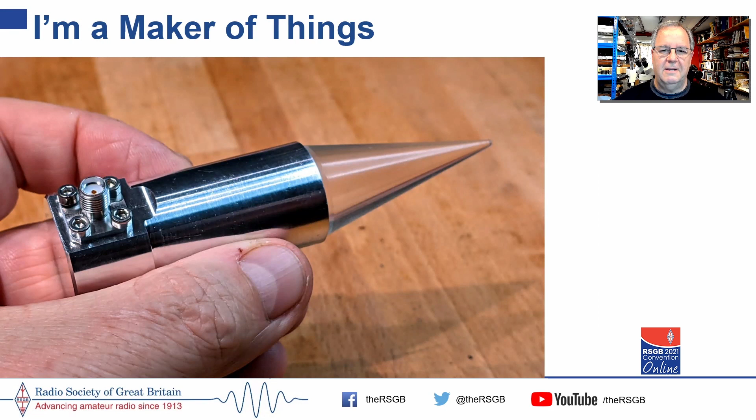So these days I define myself. What I do in life is I'm a maker of things. I create things. Microwaves and machining has sort of taken over my life at the moment, and I'm very, very busy making exciting and interesting things with some very exciting and interesting people.

45 years ago, as an electronic engineering student in a different life and another century, I took a short course in the basics of machining and metrology, taught by Bob Corley and the team at what was then the Post Office Factories Division. My father and several uncles had worked as machinists and inspectors, mostly on gas turbines and turbochargers. All of them advised me very strongly to choose a career path which didn't involve oil, swarf, noise, danger and 6 AM shifts.

So I followed my Auntie Val and great uncle Les into the world of electronics instead. Then microprocessors happened and personal computers, and as a result I've wasted the intervening 40 years getting paid to do things to computers instead of real work.

I first got into microwave radio in 1974, and of course I asked my dad for help making a 10 GHz micrometer wave meter and a directional coupler and Gunn source. Exciting times. I migrated to LF for a long time after that, rarely operating above 2 MHz. But I got bored of stamp collecting once I was approaching 300 DXCC entities worked on top band.

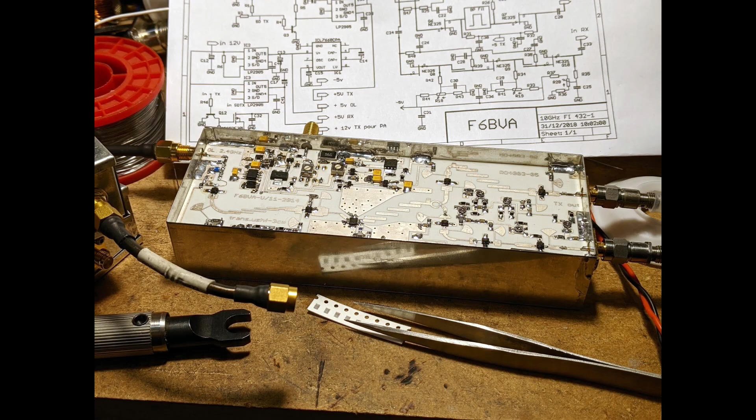It took me 25 years to realise that I didn't really enjoy talking to random strangers on the radio. I was more of a maker than an operator. It was a big relief to realise that was perfectly fine.

5 years ago I subscribed to Dubus and saw wondrous creations in metal that were full of mystery about how they worked and how they'd been made, and I wanted to play. My father had just died, and as I'd never really talked to him about machining and metrology and didn't know any machinists, I had to turn to YouTube and Twitter to gain an education.

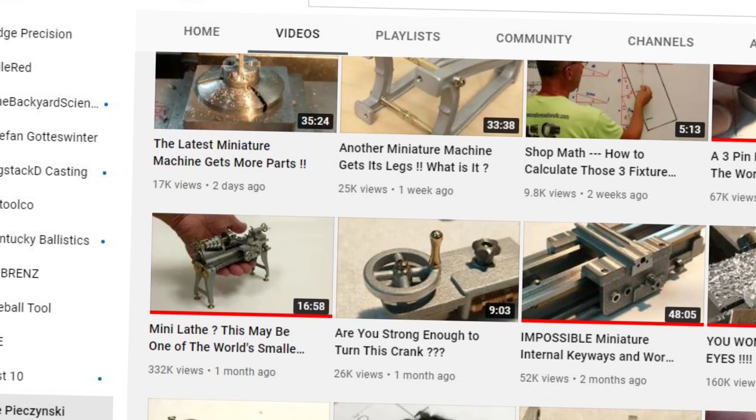I talked at length to wise old metal bashers who all advised me to invest in old cast iron beasts and learn the trade on those rather than buying a shiny Chinese mini lathe. They also told me very firmly that good measurement tools were vital and to expect to spend at least as much on tooling as on machines.

Oh, how I scoffed. 4 years later, I had my first article on machined microwave antennas published in Dubus. My mum was very proud.

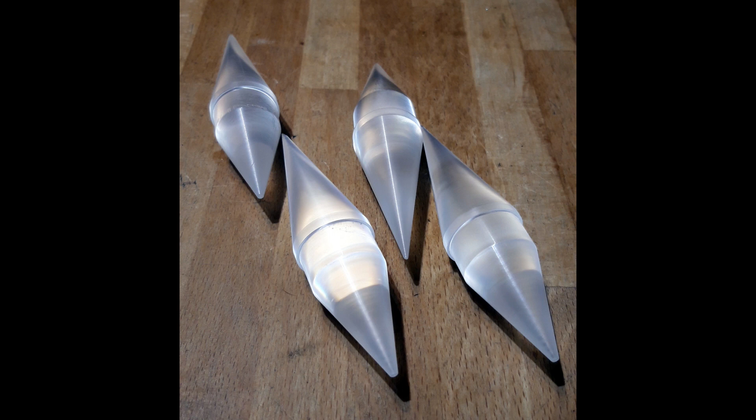This is the story of how I've had a huge amount of fun turning ideas and theory into functional antennas, filters and other parts. I'm using my newfound modelling, machining and metrology skills with tools that cost about the same as a reasonably fanatical radio amateur would spend on radios and antennas. The tale follows the genesis of the designs, the modelling of electromagnetic performance, mechanical stress and heat flow, material selection, and how I turned those ideas in my head into real functional objects, enabling folks who enjoy operating more than I do to have fun on the radio, while I have fun making things.

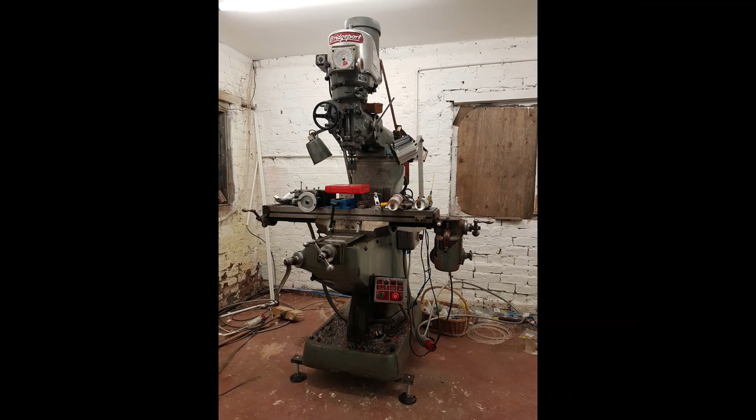My first purchase was a 1962 Bridgeport milling machine, which weighed about the same as a small car. Second through the door was a 1982 Colchester 1800 lathe. With those two items and a decent micrometer, if civilization ever collapsed I'd be able to rebuild it. I added a horizontal bandsaw and a 14-ton hydraulic press, and I was ready to cut some metal.

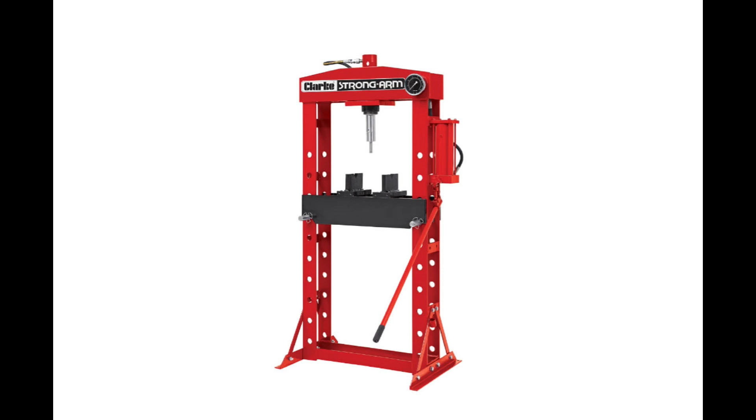The first project I tried was a high-power 1296 MHz coaxial low-pass filter. I used the design tool from Dominique F1FRV to design a 9th order LPF using 7/16 DIN connectors. The design tool runs in Excel and it calculates the end effects, fringing, termination adjustments and even factors in the capacitance of insulating spacers.

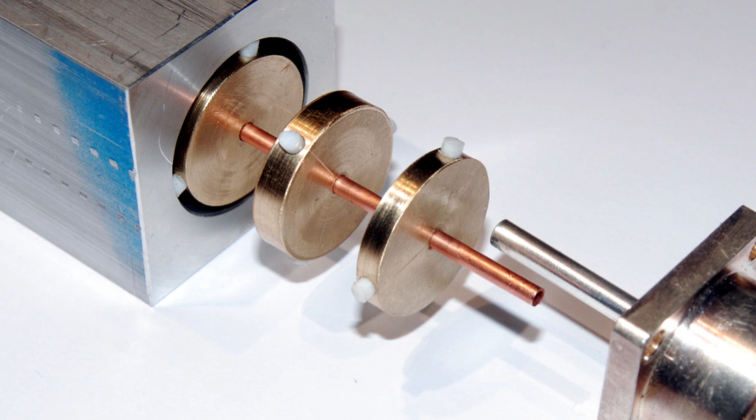I had some 3mm copper pipe, so I used that as the core conductor. The diameter of the outer tube was limited by the size of the 7/16 DIN sockets. To keep the tolerances reasonable, I picked a 1.5mm air gap, meaning I needed 25mm discs. After specifying the acceptable ripple and the corner frequency, the dimensions looked reasonable, so I made a CAD model in Fusion 360 just to be totally sure there were no issues with clearances or manufacturability.

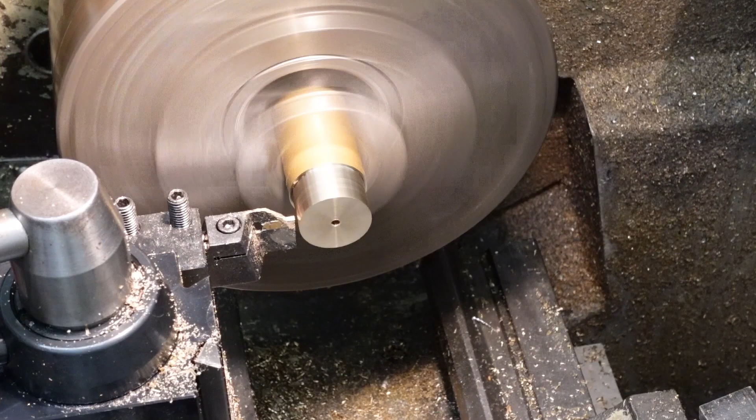I used Fusion to create a dimension drawing and disappeared into the new rather empty machine shop and started making chips, turning some brass bar to 25mm OD, facing it off flat, and then drilled and reamed it to 3mm, cutting small countersinks to help control the solder beads and improve wicking. I parted off the first disc about 1 millimetre oversized, then repeated the process for the other 3 discs.

Trying to hold a thin brass disc in a lathe chuck or collet is not easy, so I turned the remaining bar stock to 20mm diameter, faced it off, and cut some shallow concentric grooves in the face.

A drop of super glue on the machined face of the first disc fixed it firmly in place and left some room for me to measure the thickness. I faced it to the final size, did a very light deburr of the sharp edges and countersunk the central hole as before. A quick toasting from a blowtorch melted the glue and released the finished disc, which I cleaned with superglue solvent then acetone.

A swift reface to the block was easier than trying to clean it, and I repeated the operation for the other discs, getting them all within size to better than 10 micrometers using a 1 micrometer resolution Mitutoyo micrometer.

I popped them into the mill vise with an end stop and drilled a shallow 2mm diameter hole at 3 points around the periphery of each disc, and then made some aluminium spacers to hold the discs the correct distance apart, applied solder paste to each disc and fired up the blowtorch.

After a clean-up I machined the rectangular block to size, drilled and then bored it using a boring bar on the lathe and drilled and tapped the socket mounting holes. It needed a porthole in the underside of the block so I could reach in to solder the pin of the second 7/16 DIN socket.

The next job was to fit and trim the 2mm diameter PTFE pips to length using a 1.5mm thick template, shaving the excess with a scalpel.

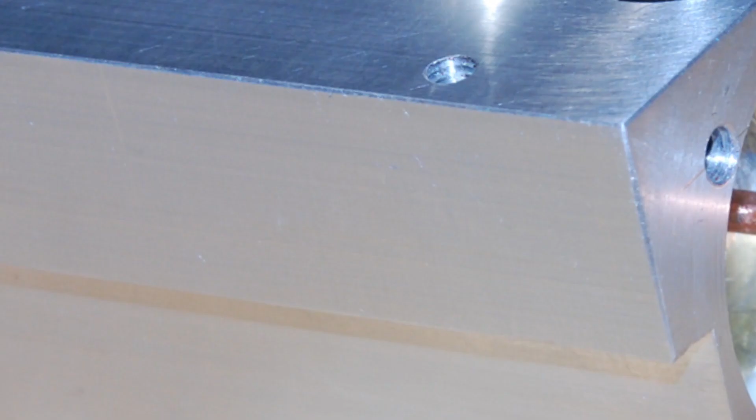After soldering one socket to the end of the centre conductor and filing away the excess solder, the next step was to poke a soldering iron through the porthole and solder the pin to the tube. Making that dished plug for the porthole was more work than the entire body, but hey, I'm doing this for fun.

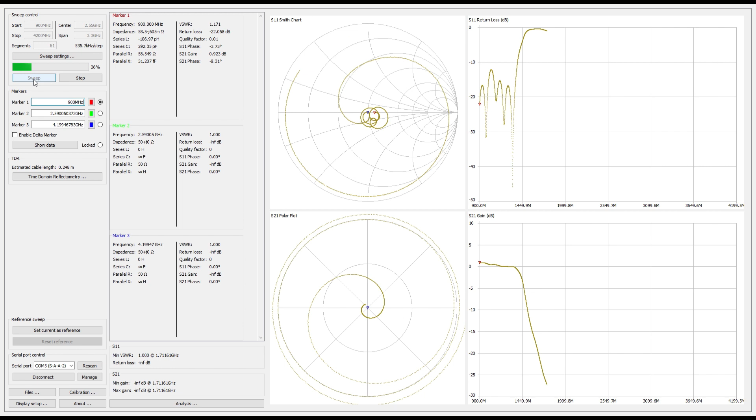I tested the low pass filter using my HP signal generator, directional coupler, reference load and spectrum analyzer. But since low cost VNAs had become available, I used my pocket VNA to check the results. More recently I bought a NanoVNA V2+4, which is much faster to calibrate than the pocket VNA. The match between the location of the zeros and corner frequencies between QUCS, the SpecAn and VNA results are pretty reasonable, so I think my machining must have been up to spec.

I needed a combiner for a pair of 250 watt amplifiers on 23cm. Making an air dielectric rat race hybrid seemed a great idea at the time. I used ATLC2 to model the surge impedance of a round inner conductor at the centre of a hollow rectangular outer conductor.

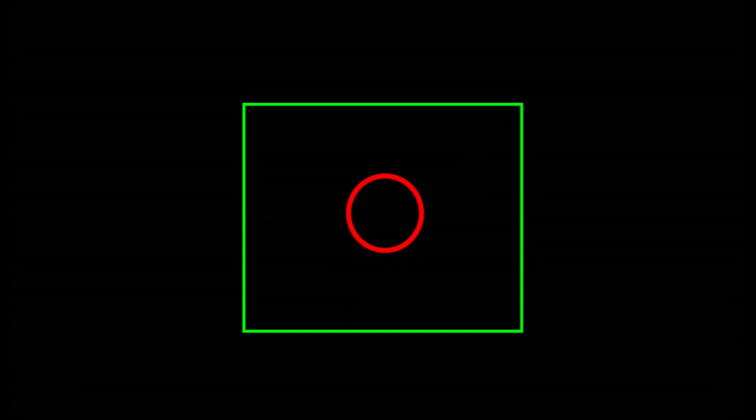The program takes an arbitrary bitmap image as input, using the colour of the pixels to define which part of the cross-section is a conductor, air or dielectric, and what connects to what. I was aiming for 70.71 ohms with a 10mm copper ring, setting a fixed vertical dimension and varying the width to get the match.

I machined the body and lid and turned a joining plug for the ring. After cutting the ring precisely to length and soldering the joint, I checked its circularity on a tapered mandrel. Tapered sleeves reduced the mismatch at each port, and I supported the ring with U-shaped aluminium spacers and soldered all the joints.

Drilling, tapping and counterboring all those holes for the lid was kind of relaxing. Testing showed the return loss was a worst case of 19 dB and interport isolation was over 30 dB, with a balance between the two ports of around 1.2 dB. Not brilliant, but then this was more like plumbing than precision engineering.

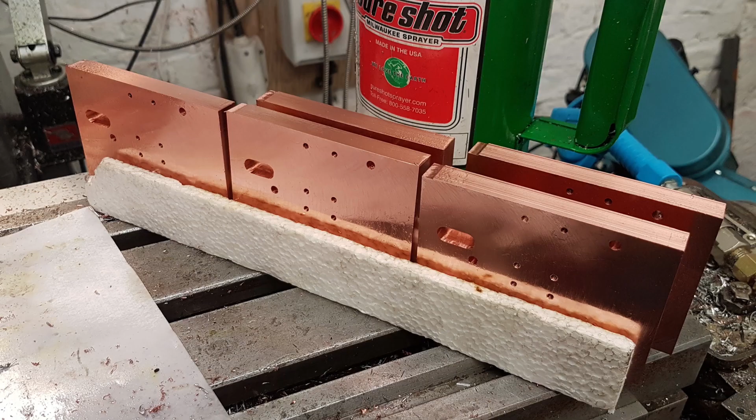Now I needed a few more amplifiers, so I ordered some 4 inch by 1/2 inch copper bar to make myself a few heat spreaders. But when the invoice arrived with a heavy thump in my inbox, I realised I'd bought 4 metres instead of 1. The bar weighed 42 kilograms and cost the thick end of £450.

I decided to recoup that by making some DF9IC spreaders for sale. So far I've shipped about 50 of those spreaders and still have a dozen more to finish. I'm almost through my 3rd copper bar now.

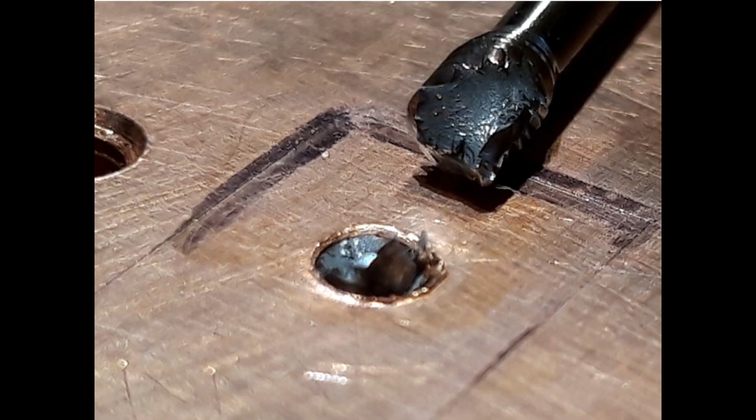I had a steep learning curve with machining copper. Snapping an M3 tap is far too easy in nasty, gummy, grabby C101 copper. I migrated to thread forming taps and found some really good tapping compound. Snapped taps are now a rare event and usually from carelessness.

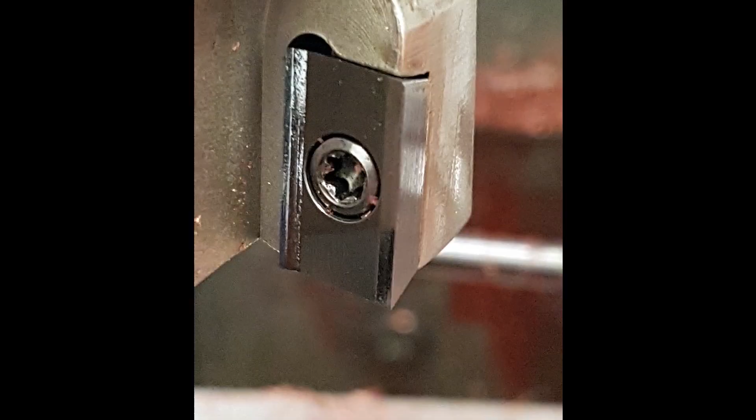Face milling was even more challenging. C101 galls and tears as you machine it, and it cold welds to cutters. Horrible stuff. I tried all sorts of techniques with fly cutters and shell mills, but I've settled on a trick I saw on YouTube: a 7-bladed 80mm face mill fitted with a single positive rake polished radius carbide insert. By careful choice of cutting insert geometry, spindle speed, feed rate, lubrication and adjusting the slideways, gibs and lead screw nuts to perfection, I'm now able to get a reasonable finish on copper.

Moving to C111 free machining copper has helped a lot, although it's a lot more expensive than the gummy stuff. Wholesale copper prices are now more than double what they were in 2017, and the retail cost has almost trebled.

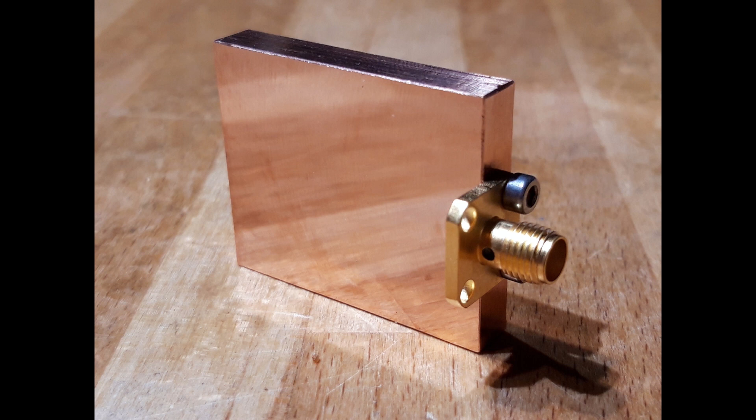More orders for heat spreaders followed, with W6PQL models being popular, but also some specials for tiny 5.7 GHz devices, a 3.5 GHz unit with M1.6 screws, and some high power dummy load mounts.

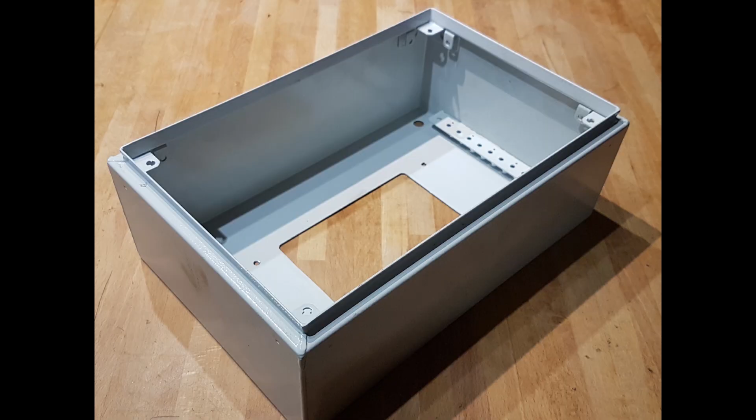This is a 5.7 GHz masthead transverter to PA system I built in a steel powder coated enclosure. To get effective cooling to the outside of the case, I machined a rectangular opening in the back panel, then fly cut the surface of an aluminium plate, milling a raised area of exactly the right height to fit through the hole and end up flush with the back face.

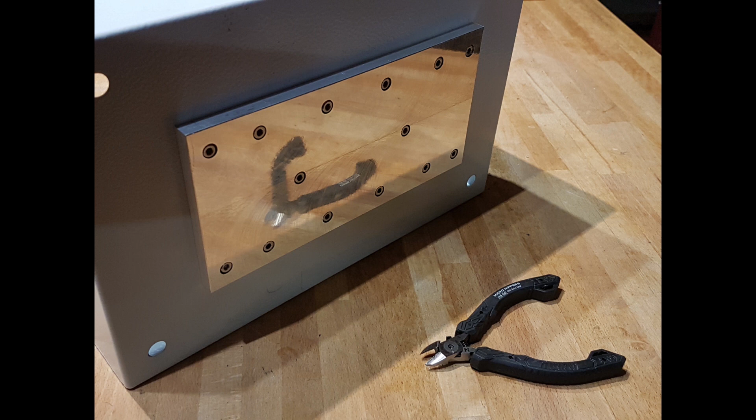A flat plate bolts into blind holes in the porthole plate to prevent leaks, and the mating faces of the aluminium have a smear of heat transfer compound. The outer parts in contact with the steel are coated with a clear neutral cure sanitary silicone, and the whole sandwich was nipped up to a low torque, left for a couple of days, and then tightened.

I have to be careful to maintain the heatsink above the dew point so I don't get condensation inside the case from the very efficient cold bridge this creates. There's a Gore-Tex breather in the case wall and I flood it with argon each time I close the lid. A container with zeolite desiccant granules inside the case keeps things dry, but the thermostatic control is also a useful protection.

I made a few dedicated clamps for this build. These days I'd probably just 3D print them, but I didn't have a printer then.

Over the last few years I've made a lot of antenna mounting hardware, things like elevation drives for dishes and EME Yagis, bracing rods for dish feed points, custom quick detach mounts, anti-rotation clamps, and even a through mesh porthole for feeders in a dish.

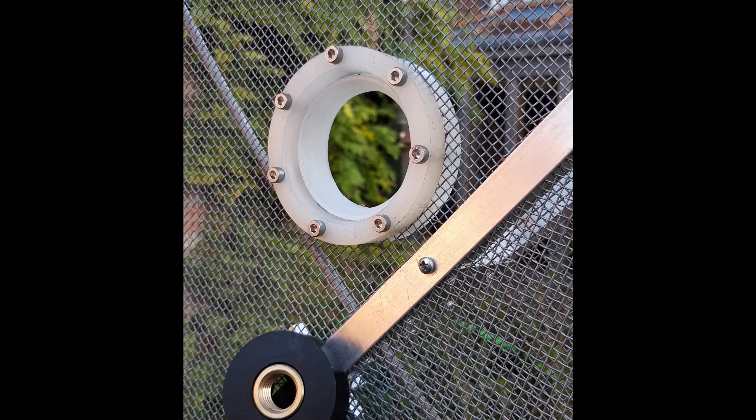Getting the stiffness and precision required for EME elevation drives sometimes needs bronze bushes and grease nipples, but I try to stick to ultra high molecular weight polyethylene for bushes, as it doesn't need lubrication, it's more wear resistant than steel and has less friction than PTFE.

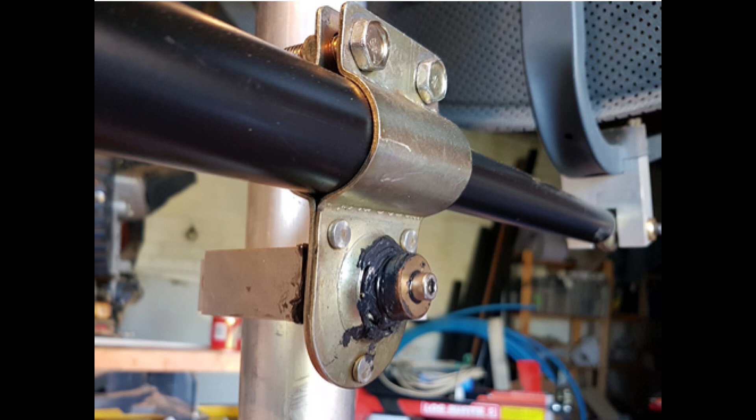One of the first elevation drives I made was for my own 10 GHz dish. I used a hugely over-engineered elevation actuator that I happen to have, and made close-fitting clamps and clevis attachments for it. The mast clamps are made by inserting a spacer between two aluminium blocks, then drilling and boring the mast hole. Once the spacer is discarded, the two halves fit very closely to the mast, so there's no risk of crushing or slippage.

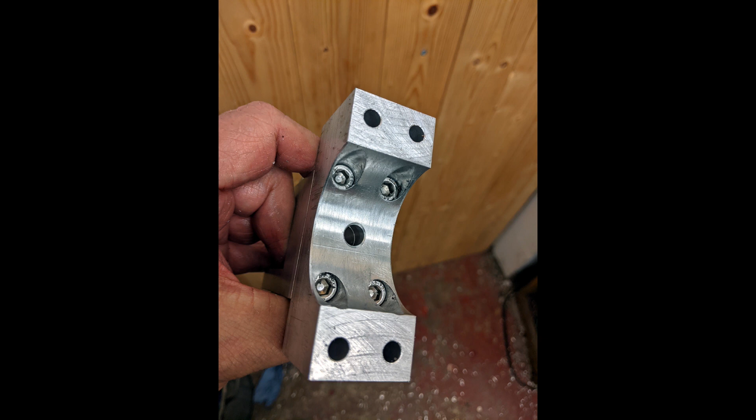I usually cut a fine taper on the edge of each curved face to avoid a stress riser or any pinching. Where a clamp's going to be in place for years, I usually just use gap-filling Loctite to protect the stainless steel hardware in the aluminium threads.

But where the bolts need to be refastened regularly in aluminium, I use helicoil inserts, or use nuts on the bolts instead of threading the holes.

For larger dishes and Yagi arrays, a rather stiffer knuckle arrangement's needed. The torques can be significant and a wider stance is needed to ensure that the mounts can transfer the loads without risk of distortion or fracture.

This arrangement is for a 2.4 metre mesh dish which is used on a large pneumatic mast mounted on a van. Counterweights can be added to the rear of the saddle to balance heavy feeds.

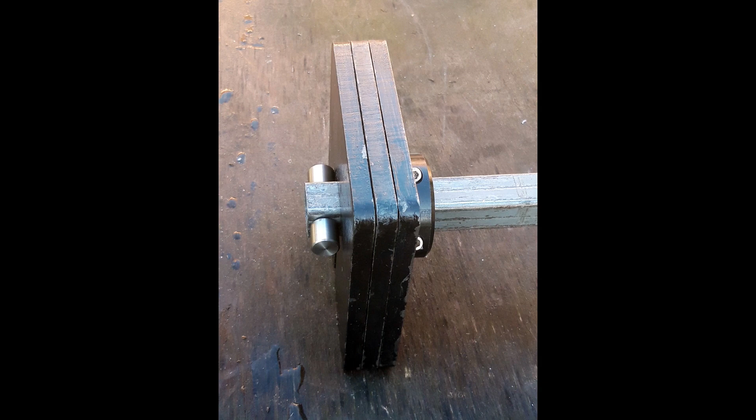The bearings are UHMWPE in aluminium carriers with a stainless steel shaft which fixes through a machined knuckle. I added dimples to the shaft so it could be locked in place with grub screws.

The saddle assembly side cheeks were milled from 10mm aluminium plate, and the front sections are rectangular extrusion with 6mm wall thickness. The whole saddle assembly is TIG welded.

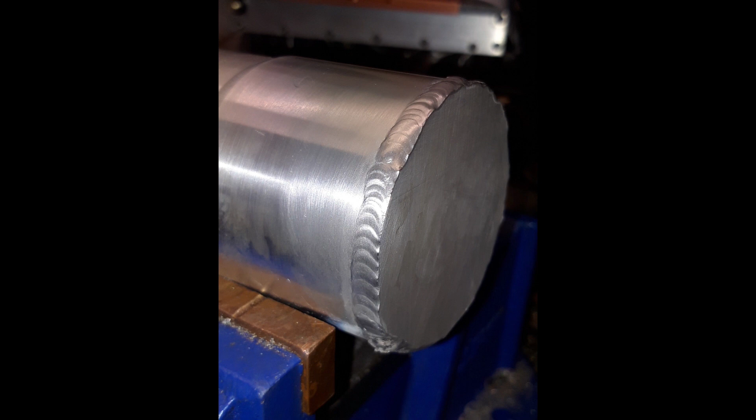Being able to weld stainless steel, aluminium and even copper has been a revelation, but I'm still terrible at it, so few of my welded creations ever see daylight. Most of the time I machine off the uglies from the outside, but with practice I'm getting better.

I made a rotary welding fixture to hold round things and turn them slowly, so I could maintain a perfect angle and torch separation, but I'm still rubbish at welding. Give it a few years and I might be half competent.

Carbon fibre tube is excellent stuff for bracing, but needs care with fixing to prevent it failing from excessive crushing forces. I tend to machine terminals from stainless or aluminium with a slight chamfer on the socket and fit a pin in the core of the tube, gluing the whole assembly with a suitable epoxy or acrylic adhesive.

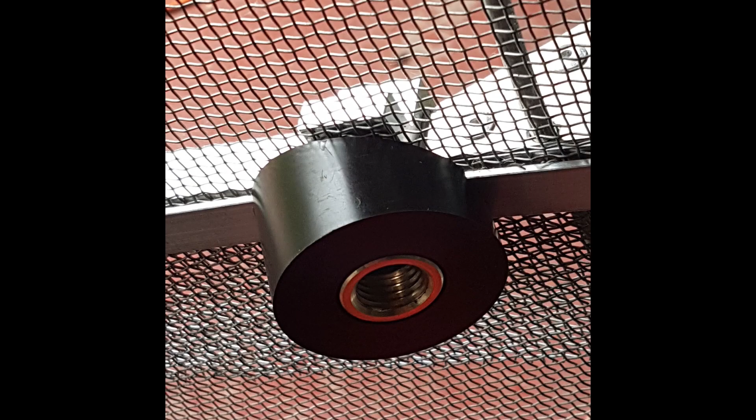These rods were to support a feed horn on a top-fed offset dish. These were a 3-point quick detach fitting for a large mesh dish with a coarse brass thread, and these are to support a 13cm Yagi above a VHF beam.

Sometimes carbon can't be used, like where it's aligned with the E field of an antenna. GRP is then sometimes the best solution, but it's also somewhat fragile.

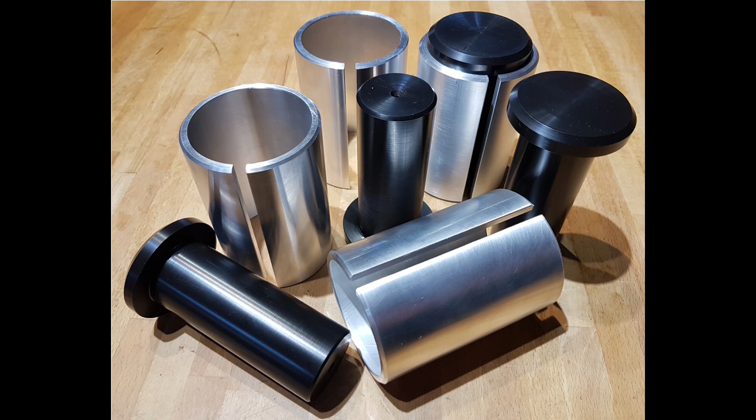I often get asked to machine anti-crush plugs to go in the end of even thick-walled GRP tube, along with split collars which spread the load of U-bolts and similar small area fixings, really designed to clamp metal tubes.

Standard size tubes are rarely the correct bore or wall thickness, so they need a lot of machining to get the right balance of stiffness and weight.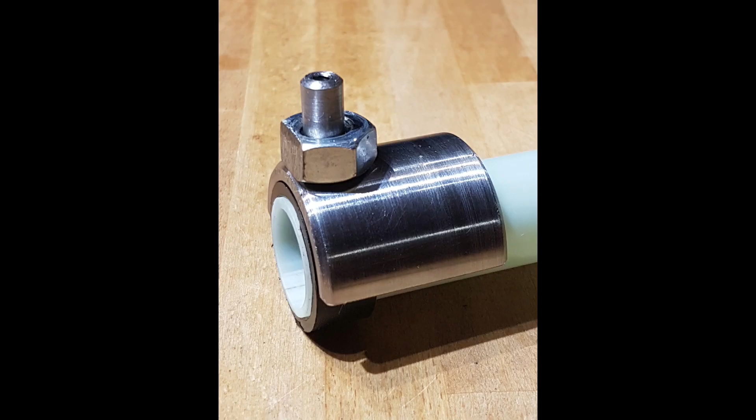Smaller bore GRP works best with precision grips and anti-crush plugs. Sometimes anti-split collars made from engineering plastic are needed and can be pinned in place. I made some drilling guides for the collars on one system so the operator could fit and drill the collars themselves.

Hinge plates for elevation of Yagi arrays present some amusing challenges. I made this one recently. It uses bronze bushes which were made from a lump of bronze given to my father in the 1940s.

The bronze was already old by then. He got it from an ancient colleague who was retiring, having worked for the firm since Edward VII was on the throne. My dad used it as a soft anvil. I hope he'd be happy to know it now has a new life, helping to work stations on 70cm EME.

The bushes are split and pinned with a void between them where grease is injected. I had a lot of fun making all the fiddly bits for this mechanism.

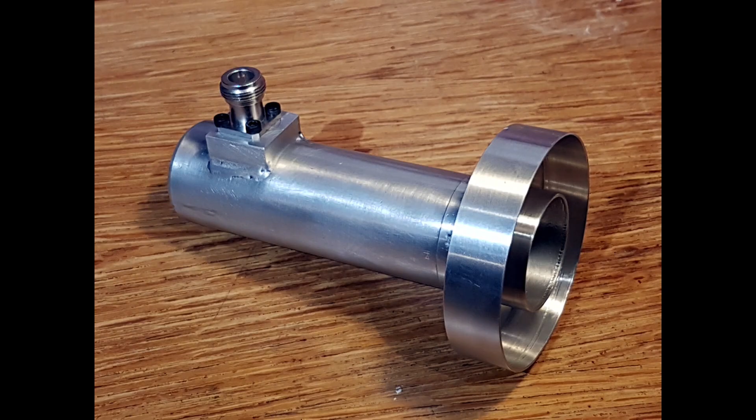Various friends had asked me about making 6 and 9cm feed horns, so I decided I'd better learn how to use OpenEMS to do some modelling of the performance of chokes, the variation with tube diameter, and the effects of pin position, size and shape.

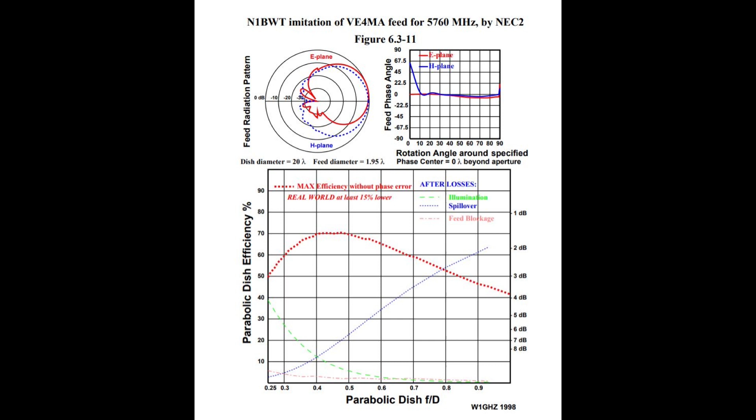The first design was a straight lift from the W1GHZ antenna book, a Super VE4MA with a 0.71 lambda bore and almost flat face. I rolled the choke using a slip roller, cut the choke disc, then welded the whole thing together using AC TIG and a filler rod.

I machined the block for the end socket with a curved face to mate exactly with the outside diameter of the horn tube. That was, how shall I say this, fun.

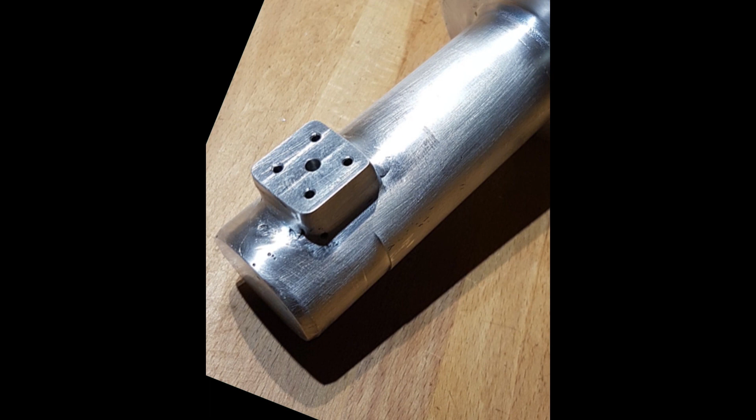The back short was a turned bit of 5mm aluminium plate with a nice chamfer at the joint to ensure good weld penetration. Once it was all welded and my terrible TIG work was machined off and erased from history, I drilled, reamed and tapped the end socket holes, and after a deburr and polish, it was ready to go.

I didn't fit a tuning screw as I had total faith in my filing skills. I managed to stop filing the pin at just the right time, for once.

The horn worked well until a minor disaster when it broke the fall of a 1.2 metre solid dish and developed a bit of a fold.

Rather than scrapping it, I donated another 6cm horn I'd made to the owner and used persuasion, flames, violence and rollers to get the squished one back into shape.

Amazingly, it was still showing a nice return loss dip at 5760 MHz after all of that excitement. It's now back in use by another operator.

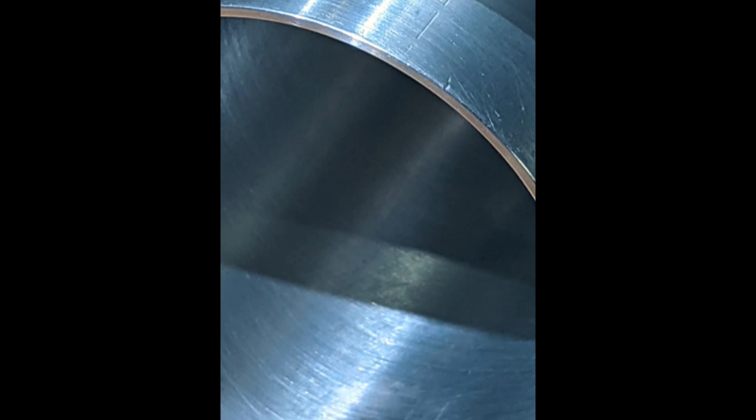Not having learned my lesson, I embarked on a few 3.4 GHz feed horns next. On one of them I used a commercial C-band scalar choke, but that was for a 2.4 metre prime focus dish where feed blockage wasn't much of an issue, and also for a 1.2 metre offset where the blockage was reduced compared with what it would have been on a small prime focus dish, for example.

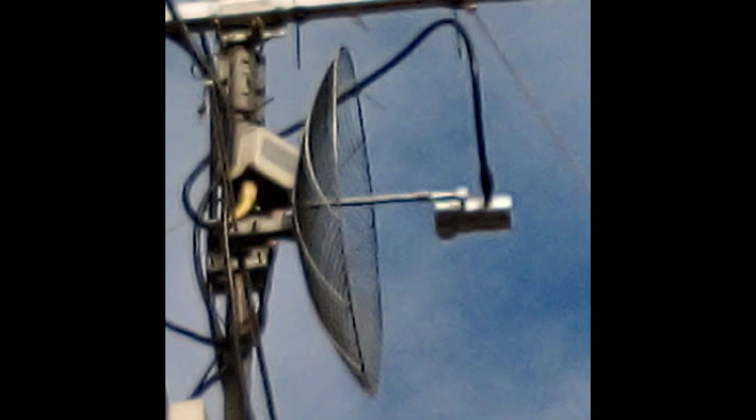OpenEMS lets me model the pattern with a given diameter and different choke sizes to illuminate specific prime focus and offset dishes with a suitable edge taper.

OpenEMS seems to work well once you understand the way it thinks about the world and meshes and ports. It's certainly not as functional as the hugely expensive commercial EM solvers, but there are few limits on model size so long as you have a big enough computer, and it is of course free.

Once I had a model that worked, I drew them up in Fusion 360, mainly to simplify getting a dimension drawing again. There are benefits to CAD even for those of us who don't have CNC machines.

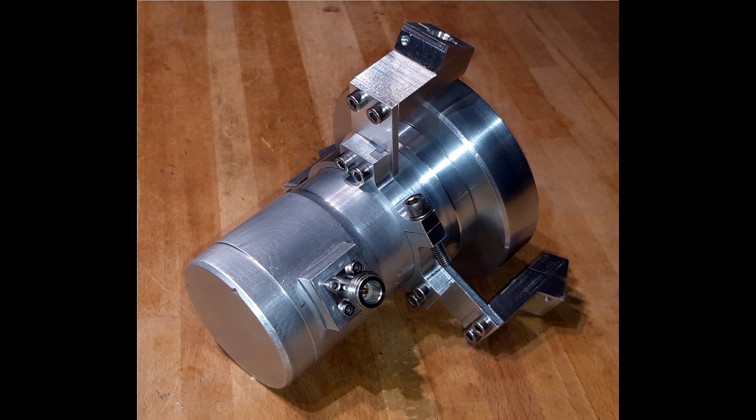Yet. As for the 9cm horns, I TIG welded the back shorts as usual, but after a bit of a nightmare while rolling and welding the choke on the first one, I decided it would cost very little more to turn the choke from a short length of round bar and fit a clamp collar so the choke could be moved. More importantly, it wouldn't need any of my terrible welding.

One day I'll get good enough at welding to be able to show my work without erasing the evidence using the metalworking equivalent of Photoshop.

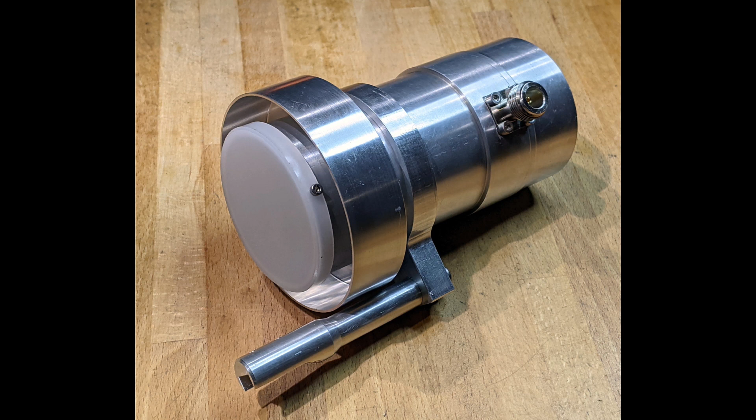As 9cm band horns are generally too large to fit any normal LNB clamp, I often end up spending as much time making clamps and mounts as I do when making the feed horns themselves.

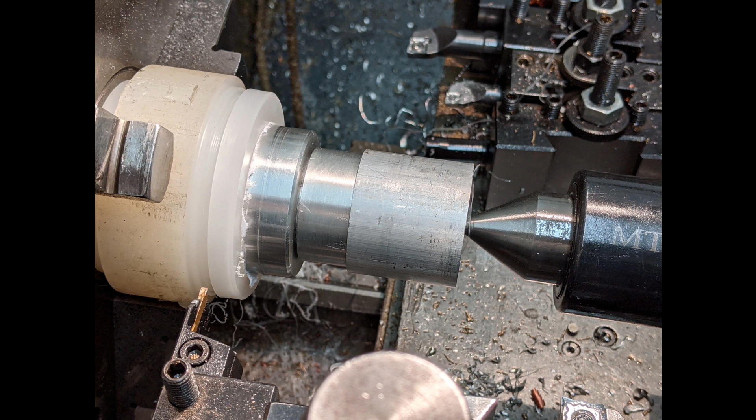Where a 9cm horn's been used for portable work, I usually machine up a radome cover from HDPE bar. This changes the tuning and match, so these days I include the radome in the OpenEMS model.

Turning a 70mm HDPE bar to 1mm or so thickness is an amusing challenge, involving a custom mandrel and double-sided tape. To make that process easier, I'm working on a vacuum chuck using a very clever vacuum generator.

You blow compressed air through a small jet orifice and it entrains the surrounding air, pulling a decent vacuum which will hold thin work pieces against a machined face with tiny holes and grooves, and a rotating vacuum seal on the other end of the lathe headstock.

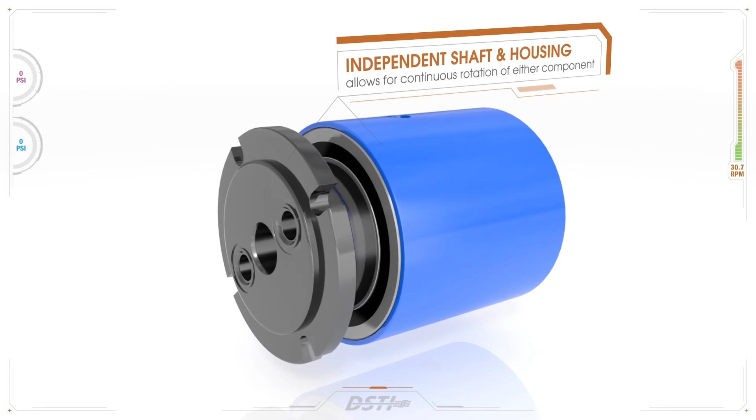The vacuum these things generate isn't high, but should give me at least 12 psi or 80 kilopascals different, so a 70mm workpiece will be held with the force of around 300 newtons, or almost 70 pounds force against the chuck face. The model I use can pull around 0.3 litres per second, so with an internal chuck volume of less than 100 millilitres, the suction reaches maximum in well under a second.

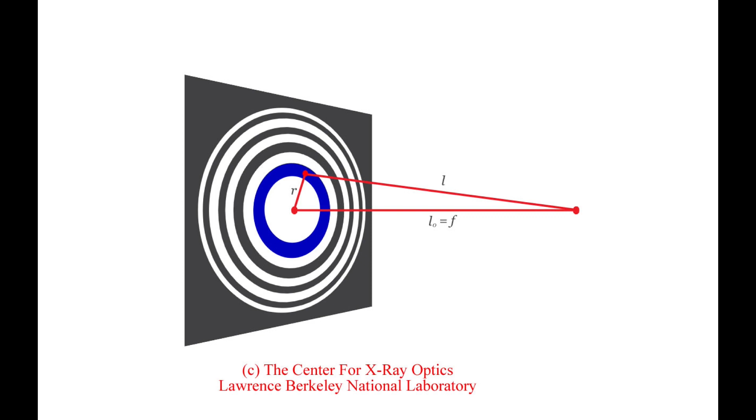One of the other applications of the vacuum chucks will be to hold thin polystyrene and HDPE discs about 200mm diameter, which I'll machine into Fresnel zone plate dielectric lens antennas for the higher millimetre-wave bands, but I'll talk about that in a different lecture.

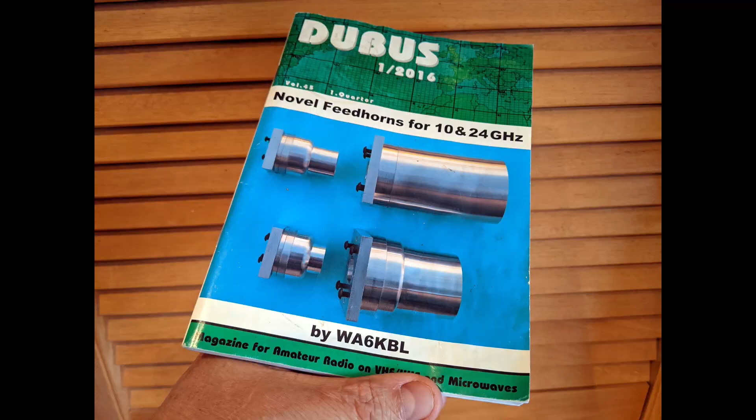After reading Geoffrey Pawlan's article in Dubus about short high-performance 10 GHz waveguide feed horns, I decided to have a go at making some for myself to Geoffrey's designs. The thickness of the oval iris plate is specified to the nearest 10,000th of an inch, and the other dimensions are fairly critical, but it worked very well and is still my primary feed on 3cm.

I made a few more for amateurs in France, and at least one of them is now being used to work 10 GHz moonbounce.

After the success with the WA6KBL horns, I was asked to make some dual band antennas for QO100 to the POTY design by Mike, Paul and Remco. I made some jigs and cut the parts on the lathe and mill, soldered them up with a machined spacer and made a machined ring for an LNB dielectric lens.

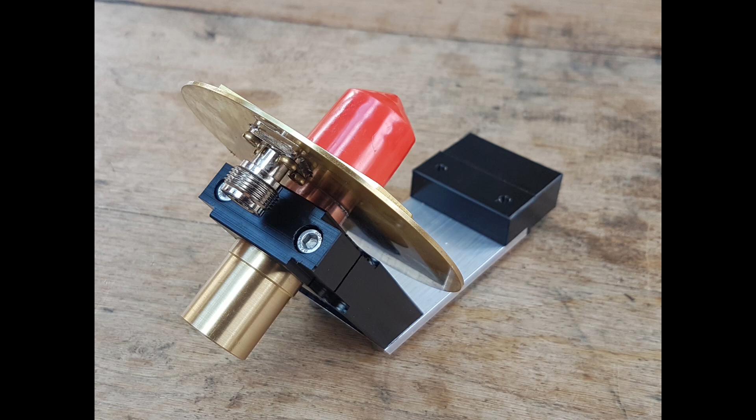It tuned up nicely with the expected dual dip in return loss at plus or minus 40 MHz as the patch was excited in orthogonal modes with a 90-degree phase difference for circular polarization on 2.4 gig transmit.

I even made a couple of contacts via the satellite before losing interest and going back to making stuff.

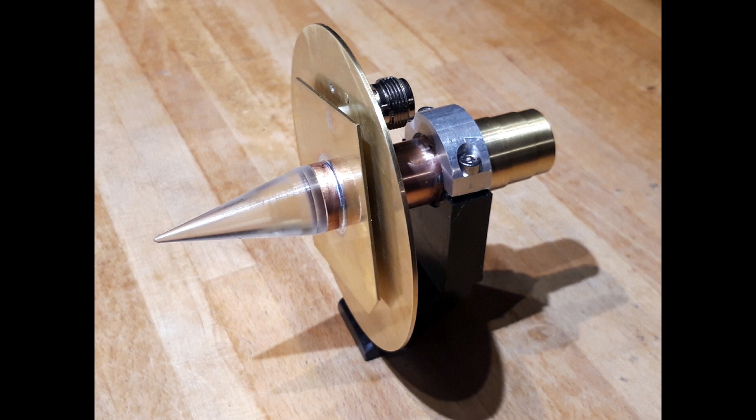After reading another Dubus article by Andrew VK3CV about the 122 GHz transceiver based on a car radar chip, I had a close look at the antenna designs that Andrew had come up with and decided to try some alternatives for folks who wanted to use flattish dishes with a large f/D ratio or very deep dishes.

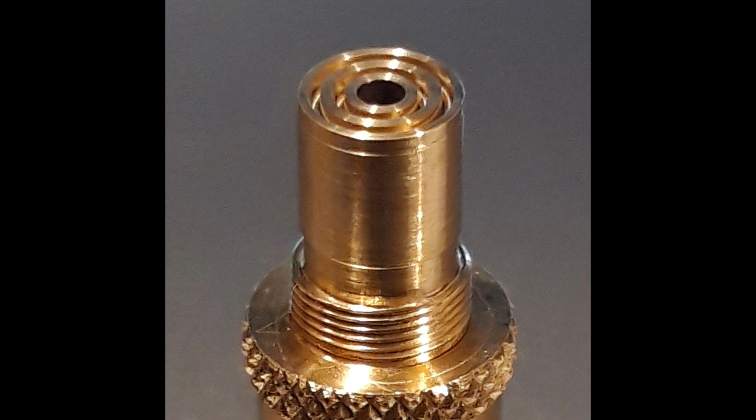My first attempt was a replication of Andrew's feed horn design, but instead of using a shaft and grub screw, I cut a very fine pitch thread into the horn and the mount duplexer assembly to make fine adjustments of the size of the duplexer cavity possible. It was quite a challenging project.

Andrew's feed horn had a face about 7mm diameter, with 3 grooves cut into the face to form a choke, like the Chaparral design for satellite LNB horns. Machining such tiny slots needed a 2-flute carbide milling cutter, only 0.5mm diameter. Those cutters are designed to spin at 60,000 RPM.

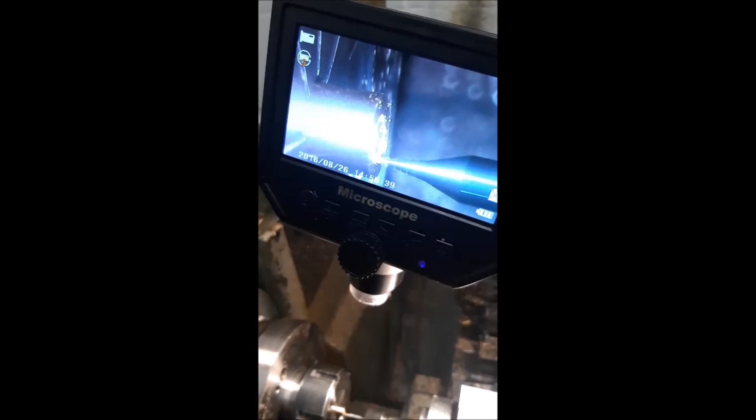That meant making a special purpose high-speed spindle using a 600-watt 3-phase motor and a variable frequency controller. I made it with a dovetail mounting so it would fit on the Aloris style wedge tool post on the lathe.

I wrote some MATLAB code to generate the taper angle and length of W2IMU dual mode horns and ran simulations to check the gain and side lobe suppression.

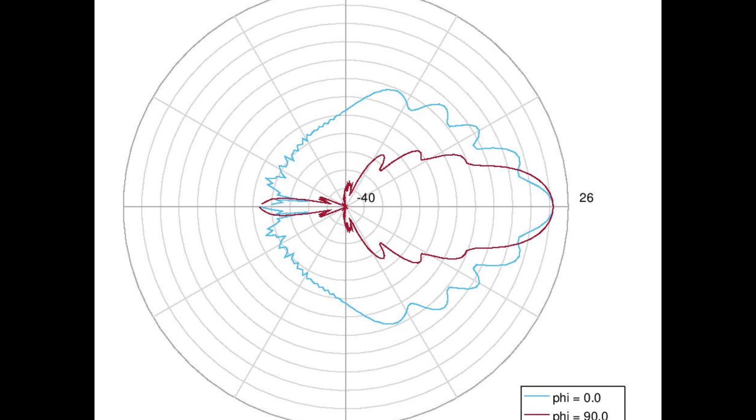An important aspect of feed horns for microwave dishes is to balance the illumination of the dish surface so that the illumination is maximised, avoiding too much overspill. A good rule of thumb is to aim for 12 dB edge taper, but that also includes the space attenuation that comes from the feed point being further from the dish edges than the centre.

Using OpenEMS, it's easy to adjust the parameters of the model to optimise the edge taper and side lobe suppression, although it does take serious computing muscle to do the simulations. The W2IMUs would illuminate dishes in the FD 0.6 to 0.8 range, more effectively than the ridged choke design that Andrew used.

The core waveguide's only 2mm diameter, so I drilled it with a special fast taper 1.9mm long series drill and reamed it to size with a tiny 2mm cobalt HSS reamer.

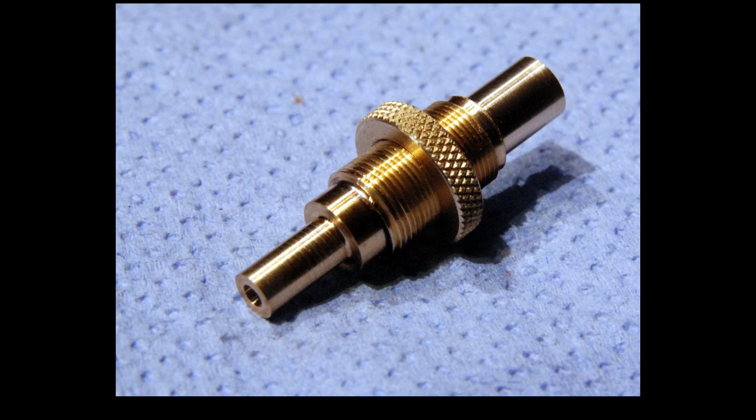The flared section's only around 4mm diameter, with a taper at 27 degrees. I found some Simturn boring bars which were made from solid tungsten carbide and were only 1.7mm across.

That meant I could drill the bore roughly to size with a normal drill and then use the boring bar on my lathe to machine the bore exactly to size and then use the compound slide to cut the taper.

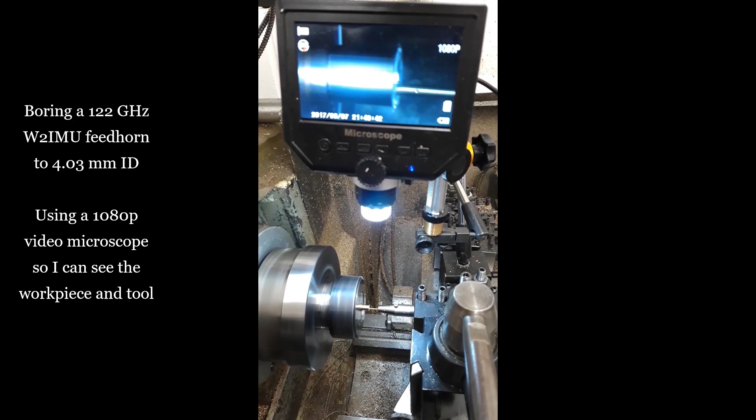Using an 800 kilogram lathe to cut these tiny features on parts weighing grams was surprisingly easy, although I had to use a dial gauge on the tool post to ensure I didn't crash the tiny tool into the opposite face as it entered the bore at the end of each cut.

I set up a video microscope so I could see what was going on and used precision gauge pins to check the diameter of the outer bore. I've got a set of several hundred of those pins to cover from 0.2 up to 25mm.

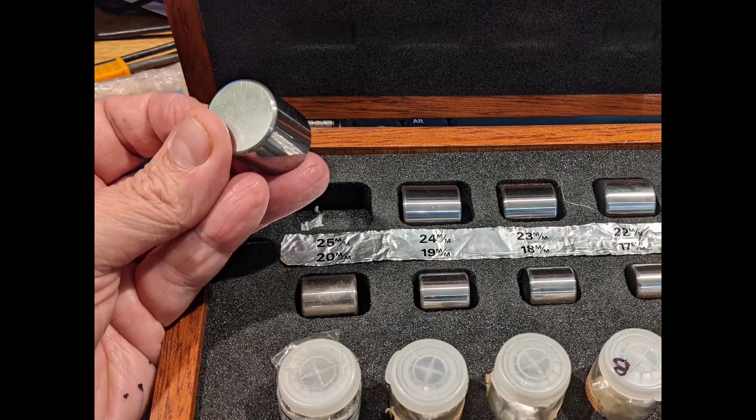Edmund Scientific supply low-cost polished deep aluminium dishes with an FD of about 0.25. That makes the focus level with the rim of the dish. To illuminate that, you would need an impossibly wide horn angle.

I decided to design a Cassegrain subreflector using the W1GHZ Excel calculator sheet. That gave me the coefficients for the hyperbolic curve of the subreflector, which I put into a table to give me a list of coordinates to define the surface shape.

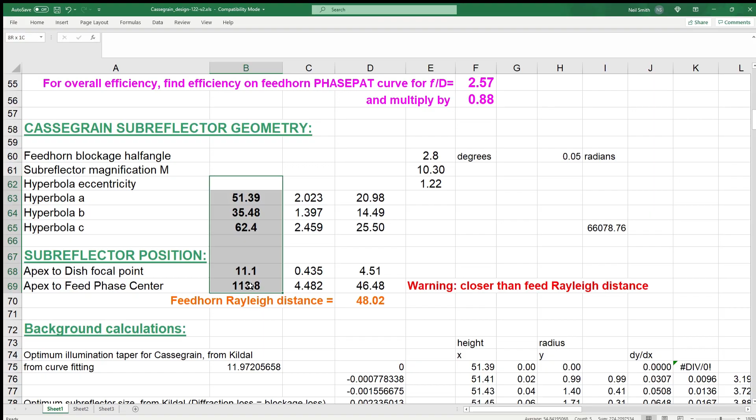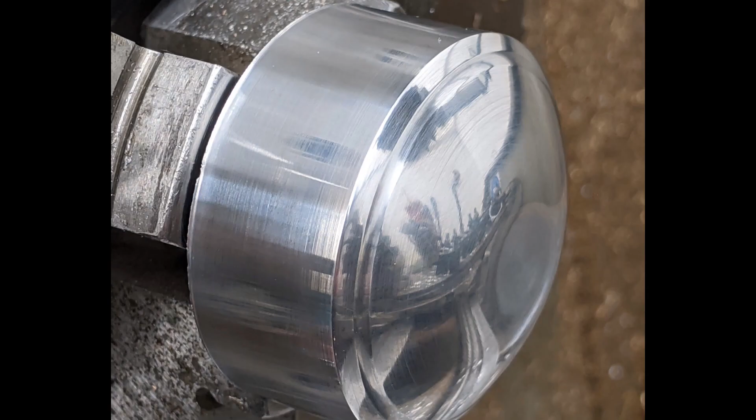Not having a CNC machine, I made a dovetail clamp to fit the cross slide of my lathe and used the XY position table to cut a flat template on my milling machine in tiny manual steps. Then all I had to do was use a round 10mm diameter lathe tool and 10mm round pin to follow the template, and I had an instant copying machine which can reproduce the flat curve as a 3D surface. The trigonometry and calculus involved to work out the shape of the curve is definitely challenging. I really need a CNC machine.

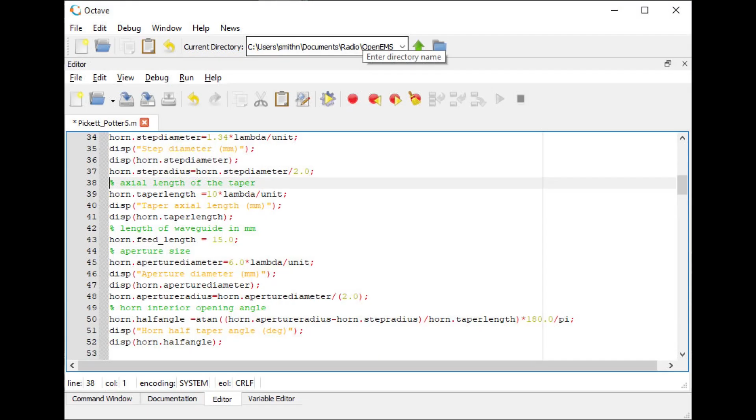The high-gain Pickett-Potter dual-mode horns for 122 GHz needed a different approach from how I made the W2IMUs because of the length of the taper. Once again, I modelled the dimensions using calculated values for the size of the guide, step and outer taper. I decided to make the taper 10 wavelengths long and a 6 wavelength diameter opening.

I took a piece of tool steel, machined it to 18mm diameter and then cut the taper on my lathe. After machining it, I used a gas torch to heat it to cherry red and quenched it in oil. That made it glass hard and brittle. So I popped it in the kitchen oven at 220°C for an hour to temper it back to usable hardness.

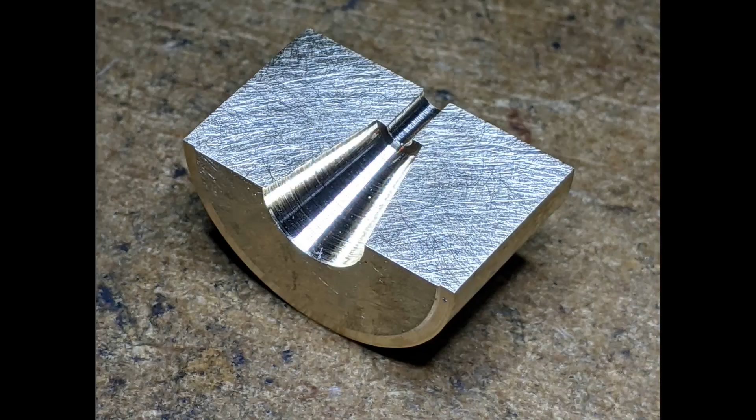The tapered face needs to have a very fine polish and the edge must be razor sharp. So I use the tool post spindle as a grinder, spinning the D bit in the chuck and using the compound slide to put a fine precision grind on the tapered face. I ground off the tip with a relief angle using my Deckel copy cutter grinder, forming the step which stimulates the formation of the second mode in the horn.

A final lap of the flat face of the D-bit with a fine aluminium oxide paper and then with diamond dust slurry, and the D-bit was ready to use. The finish it creates on brass is very good straight off the machine, but I still used a tapered Delrin rod with 2000 grit paper to polish any remaining surface imperfections.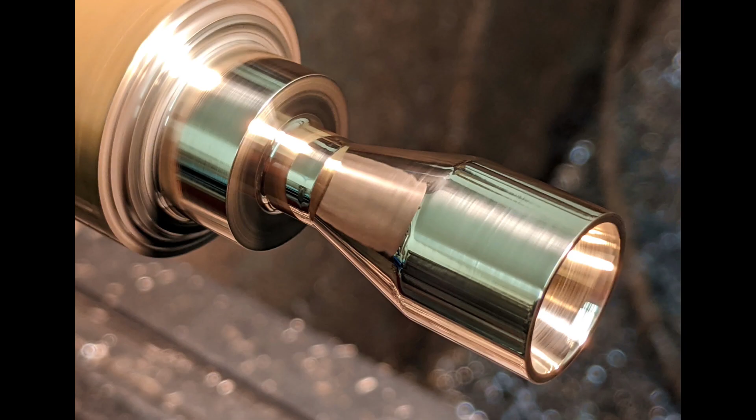Once the taper is completed, I use a 3mm silver steel rod in the tailstock to measure the depth of the taper to the step and then machine the face to the final length. After that there's just the outside diameter, outside taper, an M8 by 0.5mm thread and waveguide cavity shaft to machine. The horn fits in the same modular mount and duplexer cavity as all the other 122 GHz parts.

I've also made some horns and adjustable flange connectors for 122 GHz, machining UG387U flanges with 4-40 UNC captive lock screws. I made my own lock screws after finding how expensive they were to import. I had to make a special tool for that as well, plus a holding jig and lantern chuck to trim the threads to length.

The flange adapters were quite intricate as the flange is free rotating with a split lock nut, and there's a separate threaded adjustment for the duplexer cavity with its own lock nut. The duplexer body is reamed to 4mm to fit the 3.98mm waveguide shaft and then tapped with 4 M2 holes to mount to the VK3CV boards.

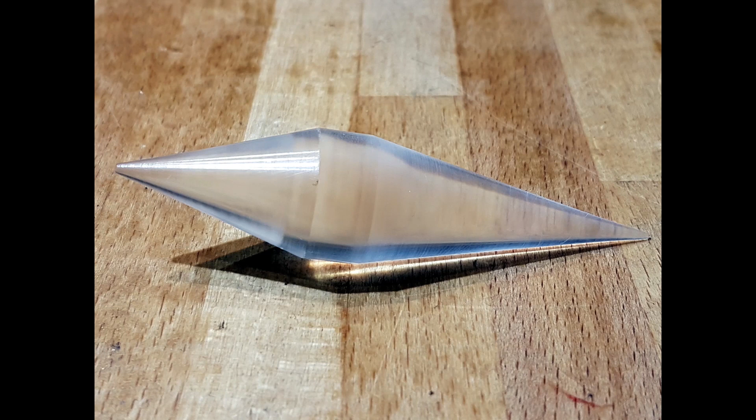Dom F6DRO asked if I could make a biconical dielectric lens for him for a 10 GHz feed horn. I machined a 21mm ID brass tube for the horn body and bought some Rexolite 1422 cross-linked polystyrene dielectric from Specialist Engineering Plastics. It machined very nicely and gave excellent results.

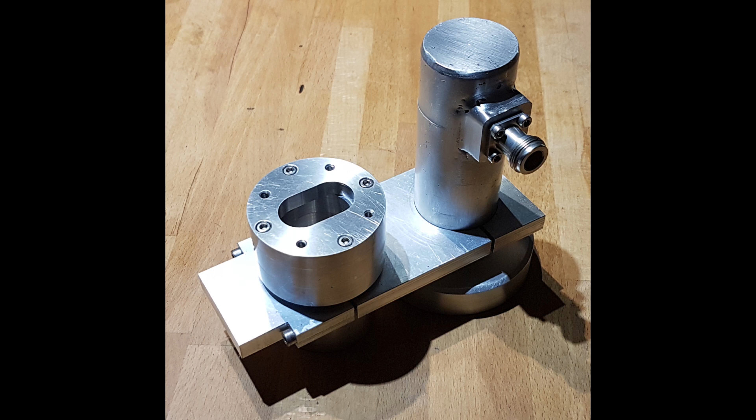I've made a few dual band setups using a cluster of single band feed horns, some mounted over and under, some side by side, and it struck me that using dielectric lens feed horns would allow, say, a 5.7 and 10 GHz feed to be mounted much closer than those with chokes, reducing the side lobes and loss of gain you get when a feed isn't exactly aligned along the dish axis.

I started with a 5.7 GHz horn, running an OpenEMS model to optimise the electromagnetic design, and then CAD as usual to get the exact dimensions into a drawing. Machining it was challenging, as I wanted to maintain the outside diameter at 40mm to fit the standard LNB clamp. That left the wall thickness at 0.8mm, rather too thin to be machined reliably.

More mangled aluminium ended up in the scrap bin. On the third attempt I had a usable body. At that point I decided I should probably make the walls slightly thicker and make a custom clamp, reducing the inside diameter would compromise the electromagnetic performance too much.

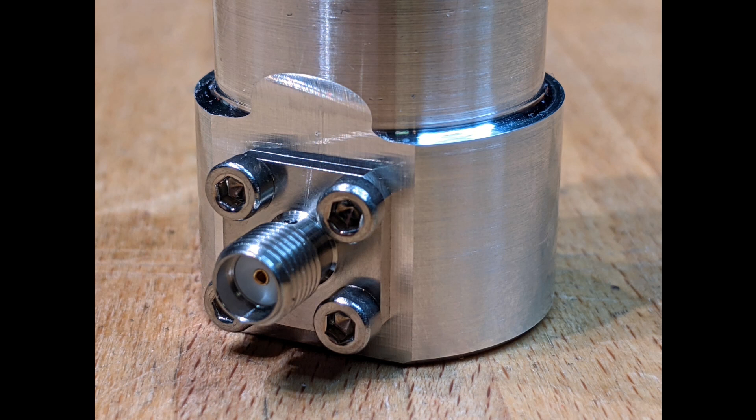The 10 GHz horn went much more smoothly. The first attempt looked good, and after trimming the SMA pin to length, the return loss was acceptable. A quick test on a turntable confirmed that the illumination taper was within spec.

I mounted the horn on a spare offset 1 metre dish and aimed it at the sun and then cold sky. It showed around 5 dB of excess noise when beamed at the sun, with a beam width of around 2 degrees. I could probably have squeezed another dB or so out of it by careful adjustment of the position of the lens horn. The next step will be to make a waveguide fed version of the dielectric horn with a tapered transition from WR90 or WR75 rectangular to 21mm circular guide.

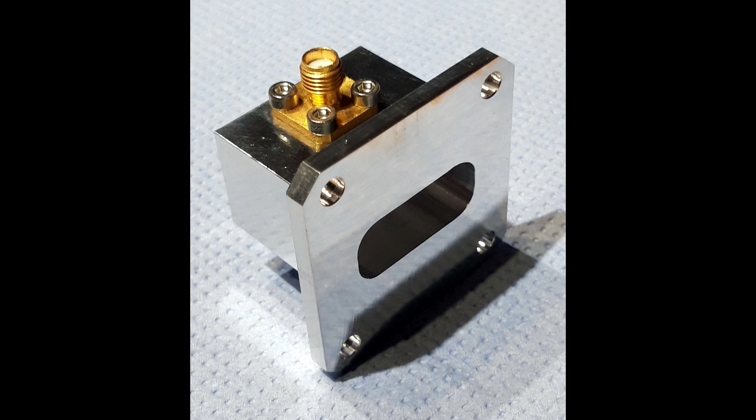So, what does the future hold for the DBN machine shop? So far, everything I've been doing has used manual subtractive machining and traditional fabrication techniques. But there are things that I can't do using those methods. CNC machines with the same precision and performance as my old manual clunkers are furiously expensive.

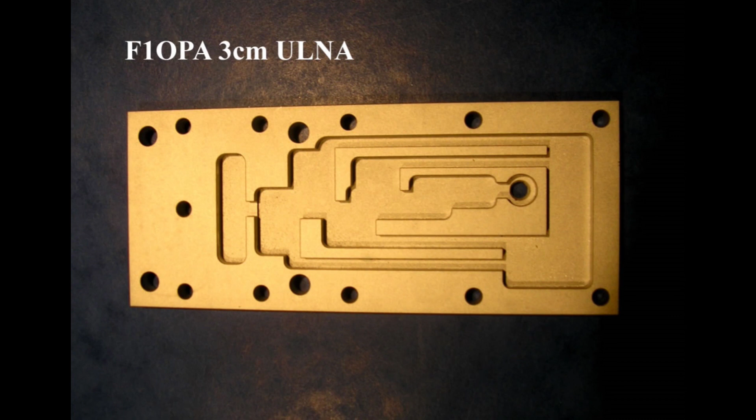So I'm working on CNC add-ons for the Bridgeport and Colchester. That'll take away the stress of cutting the dozens of tiny slots on 24 GHz slot array antennas, and also make it easier to make close-fitting covers for microwave PCBs to help suppress waveguide resonances inside cases. It'll also mean I can machine arbitrary compound curves, aspheric lenses, and make complex 3D shapes from solid.

If I ever get better at welding, I now have a giant slip roller to make 23cm and 13cm choked aluminium feed horns with welded seams and milled stepped polarising septums for large circularly polarised feeds on big EME dishes. My biggest EME dish is only 3 metres diameter, tiny really.

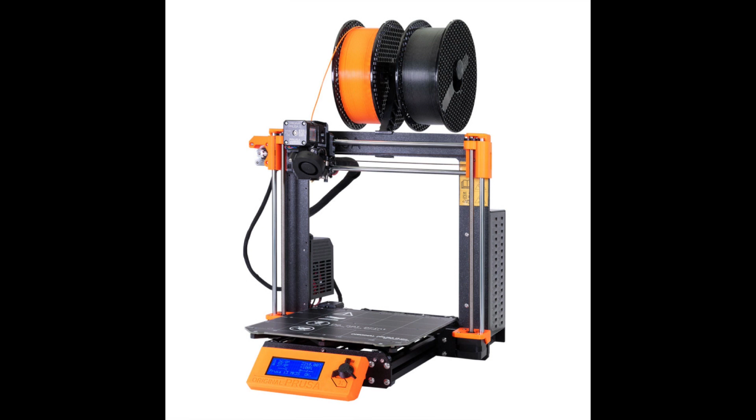As for additive machining, I've invested in a Prusa 3D printer for prototyping, as there are now suppliers who will take a CAD file and use laser sintering to make solid metal 3D printed parts. I'll be able to make prototypes in plastic before ordering the metal parts and making expensive mistakes.

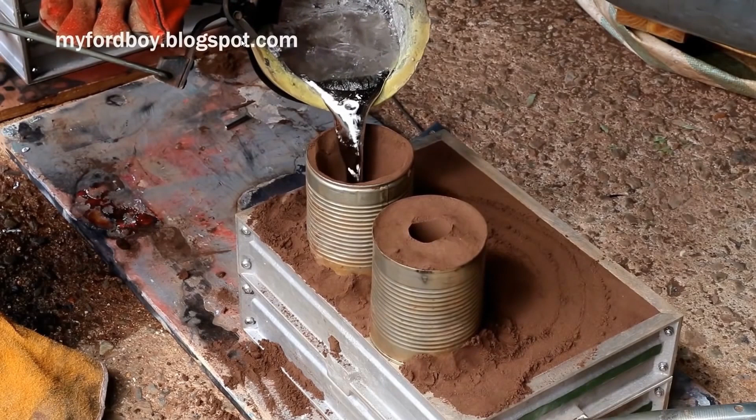Another application of the 3D printer is to make casting patterns, so I can make complex parts from molten aluminium or bronze using Petrobond oil-bound sand in a drag and cope, and sodium silicate sand hardened with carbon dioxide to make cores for hollow castings. Even fancier castings are possible using the ancient lost wax technique, but with a 3D printed positive made from polylactic acid filament.

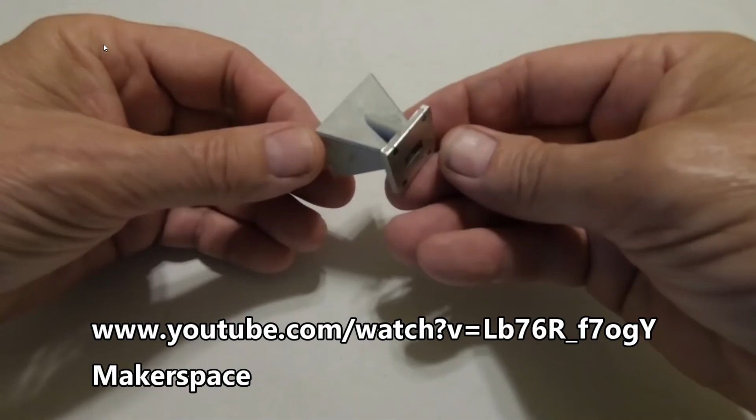The print's coated in slurry and sand, or investment casting plaster, and then the PLA is melted out and vaporised in a kiln. The empty moulds are then filled with molten metal, and you're left with a solid cast metal replica of the 3D object.

Another 3D print application is using Preperm dielectric filament to make complex lens horns and dielectric spike, dielectric guide antenna feeds.

I'm also working on anodizing and electroplating for surface protection and improving surface conductivity. But the most exciting use of chemical deposition, I think, is electroforming. If I want to make an elliptic tapered corrugated feed horn for 47 gigs or higher to get the best possible RF performance, I need to cut very deep, very narrow and very, very precise internal grooves in a tiny horn.

All but impossible, especially in copper, which is awful to machine at the best of times. The trick is to machine a negative mandrel with the shape of the inside of the corrugated horn in aluminium, then etch off the oxide, immerse it in a zincate bath, then straight into a gold electroplating tank with the power on. The zinc layer disappears instantly, leaving bare aluminium, which allows gold to be plated onto the mandrel. That's followed with a plating of silver or nickel, and then a thick copper layer.

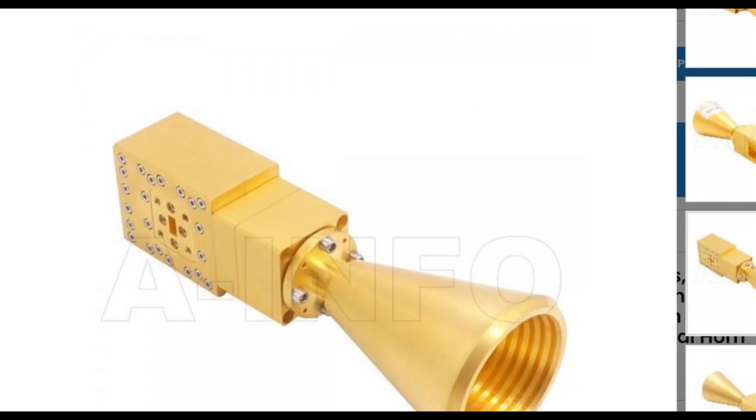The outside's machined to size with the mandrel in place for alignment, and then the whole thing's immersed in a hot caustic bath, dissolving the aluminium, leaving behind a gold-plated copper feed horn with those tiny internal corrugations.

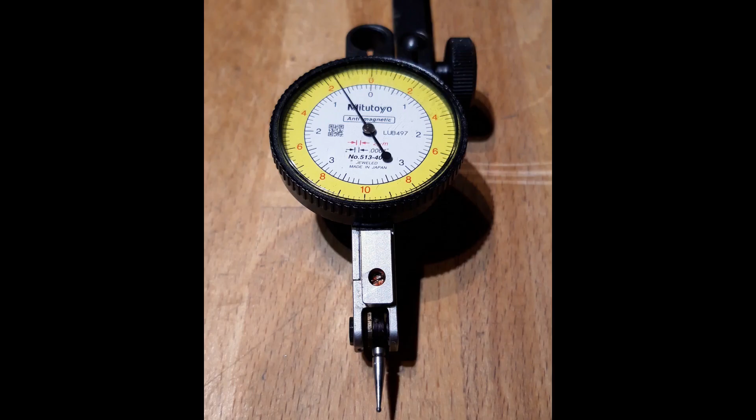So that's how I do my amateur radio hobby. I've still got a lifetime of challenges ahead in machining, design, modelling and metrology. Taking my abstract ideas and bringing them to life as physical objects is already enormous fun, but the bonus of being able to use those parts to talk to people on the radio is the icing on the cake.

I'm sure that was metalwork porn to some of our viewers today, Neil, but it confirms to me that I am indeed a wuss. Do you take orders?

Well, I've got a bit of a backlog, to put it very mildly, but yeah, I'm doing a surprising number of parts for people. People see the sorts of things I'm making, and then they go away and have daft ideas, and say 'can you make a...?' So I usually say 'probably,' and then have a go.

I used to work in an engineering company myself, and I can still smell the suds if I think about it from when I was a youngster. I used to order the bits for the lads on the shop floor to work their magic.

There's been a few comments actually. Someone who only identifies himself as 1-2 says amazing engineering there, but I have to be careful how I edit this - it says it looks extremely expensive, shall we say.

Those little horns that I make, I ship off the 122 gigahertz ones. I don't charge anything more than the cost of materials - I'm not doing this for income. So one of those little horns probably cost about 20 quid, 25 quid, something like that.